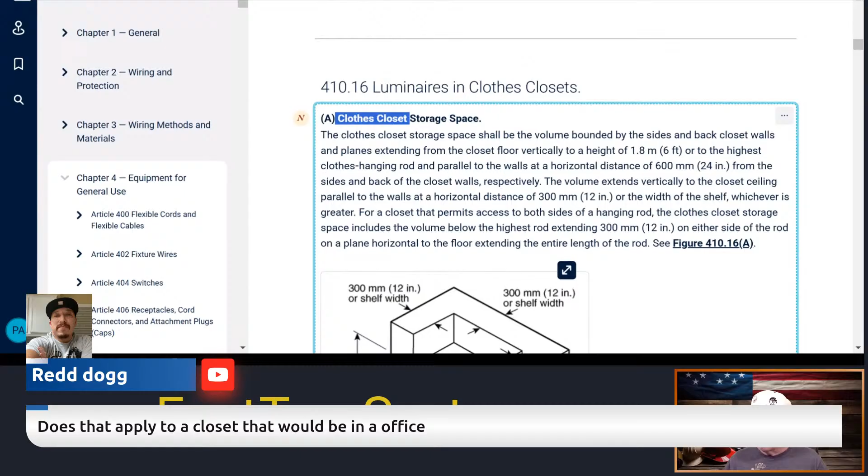So, good question somebody asked here: does this apply to the closet that would be in an office? Only if it's a clothes closet space. If it's a storage closet, then no, it doesn't apply. If it is a clothes closet, then it would be applicable. I don't see anything in this that says it's only germane to a dwelling unit. So I think the big kicker here is whether it is designed for a clothes closet, and we have a definition of clothes closet.

So if we go to Article 100, let's see what it says for clothes closet. Gotta keep going here—I'm just not sure whether it's listed backwards as closet. Yeah, there we go, clothes closet right here. All right, what is a clothes closet? A clothes closet is a non-habitable room or space intended primarily for storage of garments and apparel.

Of course, we have other things right here—definitions determine whether the rules apply. So if the definition does not apply, the area may be classified as something other than a clothes closet, such as a bedroom or something else. So you have rules you have to meet, but a clothes closet is a non-habitable room, and that can be broad—it doesn't have to be a dwelling unit for that to apply if it's a clothes closet. If it's just a storage closet in other than a dwelling application, then it's just a storage closet, and typically its primary function is not for garments.

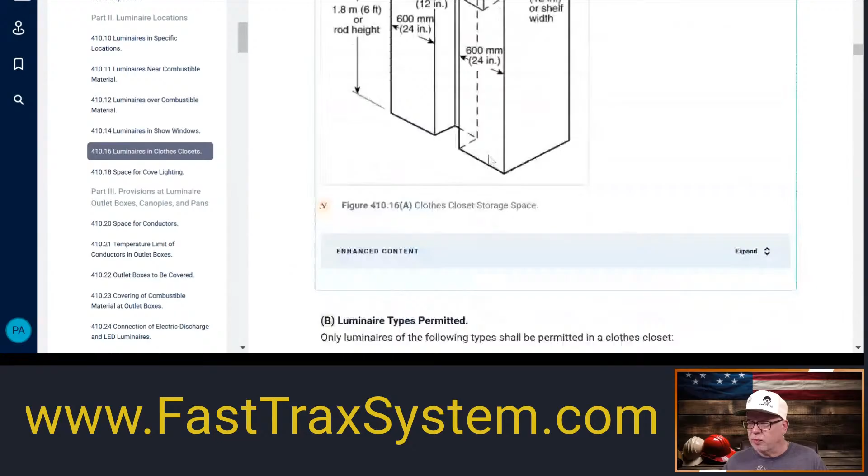Okay, so let's talk a little bit. Let's see here. Yeah, we'll go over the locations really quickly after we look at the space. Let's look at the space real quick. Okay, so this is the clothes closet storage space, and now we have a definition of what that is. That is the area where you would be having the combustible material, okay?

All right, so let's look at it and see: the clothes closet storage space shall be the volume bounded by the sides and back closet walls, and planes extending from the closet floor vertically to the height of 6 feet or to the highest closet hanging rod, and parallel to the walls at a horizontal distance of 24 inches.

Okay, so this space, if you look in this drawing, this is in the NEC as well. So this kind of looks like you have this room, the closet, and you come parallel with the side walls, you come out 24 inches. This is no man's land, which is typically where the garments would hang anyway on the rods around the closet, right? So that is the actual now defined space as the clothes closet storage space.

That is defined now. This space we're talking about is where the garments will hang, okay? And so it comes out 24 inches and it wraps all the way around the closet space, parallel to the walls, all the way around, okay?

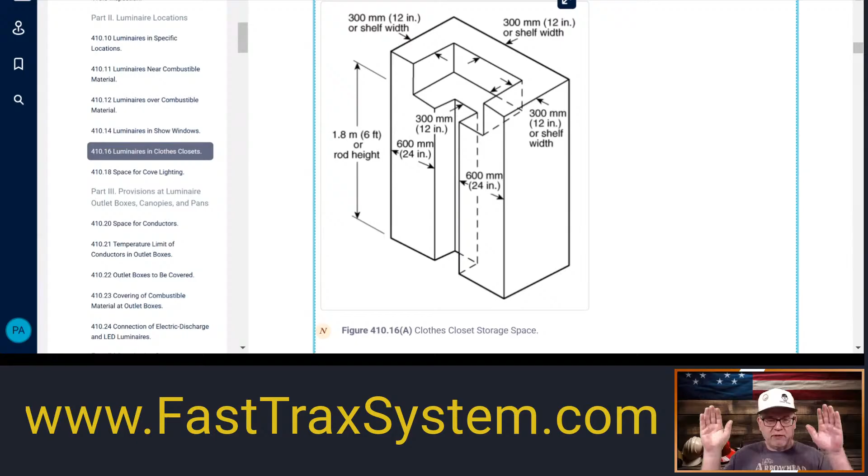And so that's 24 inches out, all the way around, 24, 24, 24. Now the height of this space goes from the closet floor, this 24 inches right here, in the back, 24 inches. This comes out, and this goes up 6 feet, or to the height of the rod, okay, if this is got for storage space.

Now let's read what it says. So it says, again, to the height of 6 feet, okay? So that is your space, or the height of the closet hanging rod. So if you don't have a rod, it's still going to be 6 feet that it has to come up, rod installed or not, if this is a clothes closet.

So you have the clothes closet we've defined, and now you have the storage space for that clothes closet defined inside of the clothes closet. And again, it's parallel to the walls at a horizontal distance of 24 inches, so 24 all the way around, out from the wall. It's making this little area you can't be in, right? And it's specifically for the garments. And the height of that zone goes up 6 feet or the hanging rod, whichever, notice it says 'or' right here.

Then it says the volume extends vertically to the closet ceiling, parallel to the walls, at a horizontal distance of 12 inches or the width of the shelf, whichever is greater.

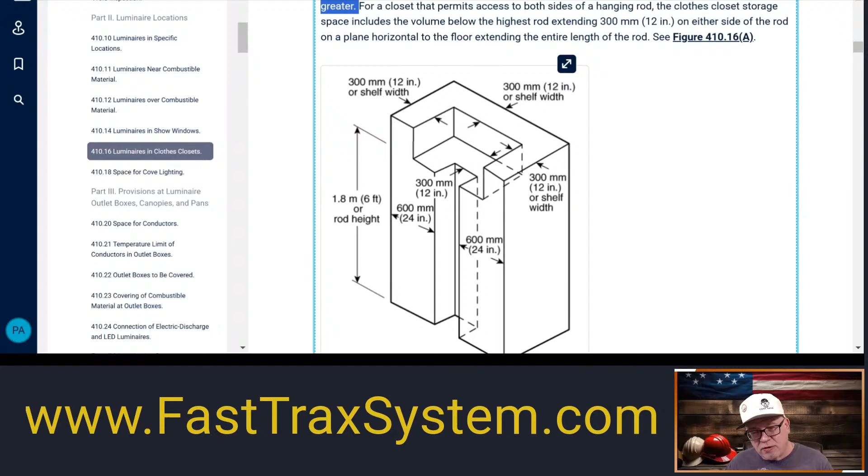Now, could it be greater than 12 inches? Absolutely, it depends on your shelf. And so that's what it says right here. If you don't have a shelf, you still are going to create an imaginary shelf and have that 12 inches.

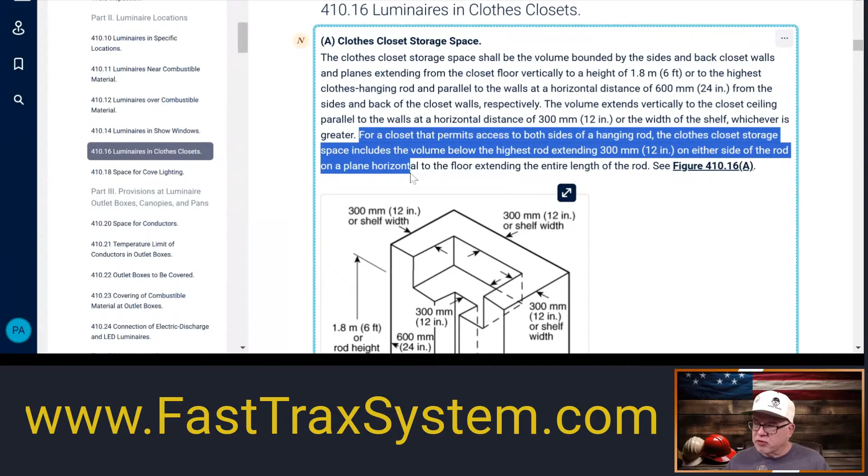Now it says, for a closet that permits access to both sides of the hanging rod, the clothes closet storage space, including the volume below the highest rod, extends 12 inches on either side of the rod, on a plane horizontal to the floor, extending the entire length of the rod. So if you have access to both sides of the rod, depending on how your closet is laid out, you're still going to have this extended space, from the highest rod, 12 inches on either side of the rod. So you're still going to be creating this no-go zone that you can't go into.

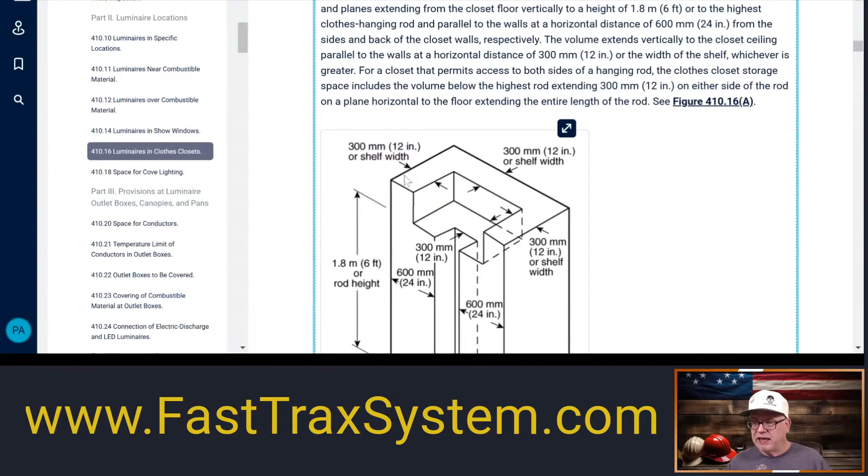And of course we have this figure here, as you all see. So this is a general thing to say, this is just your standard closet. Now they do give commentary on this, and I'll read the commentary. I'll see if I can blow this up a little bit so that we can read it.

All right, it says the 24-inch dimension in the clothes closet storage space is intended to cover the clothes hanging space. Even if no clothes hanging rod is installed, if it is a clothes closet originally designed for garments and clothing, then that kicks in that it's a clothes closet, not just a storage closet. Once you're there, now we're defining what's called the clothes closet storage space. That's why we have the two different definitions: one, we have to define the closet, and two, the space within the closet that these rules apply to.

So it's that 24 inches that comes up 6 feet and wraps around your closet, creating this little zone, if you will. And it says, if such a rod is installed, the space extends from the floor to the top of the highest rod. If no clothes hanger rod is installed, the space extends from the floor to the height of 6 feet. So, to the rod or to the 6 feet: no rod, 6 feet. In addition, the space in which clothes are hung from the closet pole or rod is defined also.

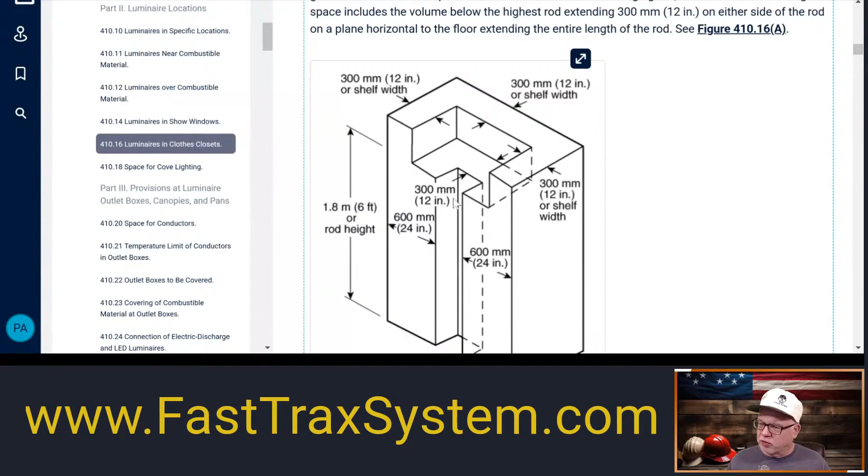All right, so we can install it up here, measuring from the door — anywhere in this space, but we have to be 12 inches from any of this storage space. Not a problem here. If we're installing on the wall above the door, we just have to make sure we're 12 inches away from this side, and 12 inches away from this side. We're obviously going to be 12 inches away from this side because we're mounting it on the wall above. Now, if we put it in the ceiling up here, we just have to make sure we're 12 inches away from this storage space. Slap that bad boy right in the middle, good to go.

All right, next: 6 inches, again for the recessed incandescent or LED luminaires that contain a completely enclosed light source — so this is above the door and on the ceiling for this type of luminaire. Now, for a surface-mounted fluorescent luminaire installed on the wall above the door or on the ceiling, it's 6 inches.

So this one typically comes in a strip. We have to make sure it is 6 inches away from this storage space on the sides, and obviously it's going to be at least 6 inches away from this side here. So anywhere on the wall above the door or on the ceiling, as long as it's 6 inches away from that storage space, that's the one we saw with the lamps that weren't enclosed, just the fluorescent lamps.

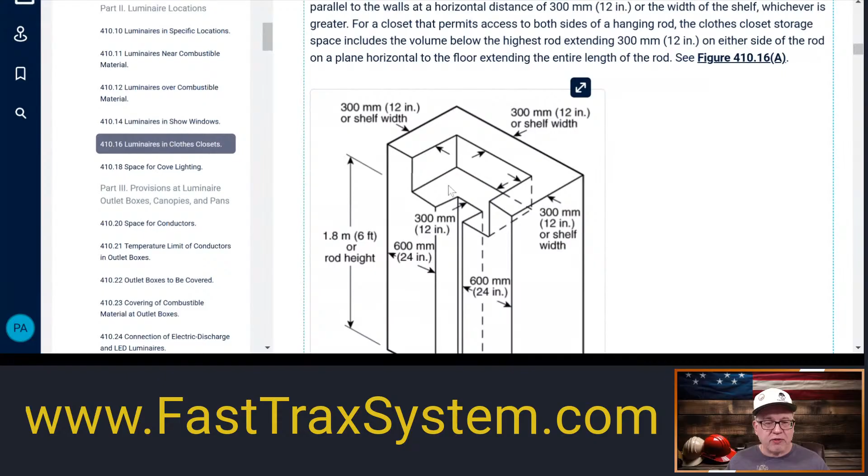So that is 6 inches. I can have a recess in here, and its clearance is going to be 6 inches. I can have the LED luminaires mounted in here, and they only have a 6-inch requirement for clearance. They don't put off as much heat. And if they're a completely enclosed source, we don't have to worry about it busting out, or with LEDs, you don't have to worry about them causing a fire from breaking, like with an incandescent where you've got the exposed filament and all that. You don't have that with these LEDs.

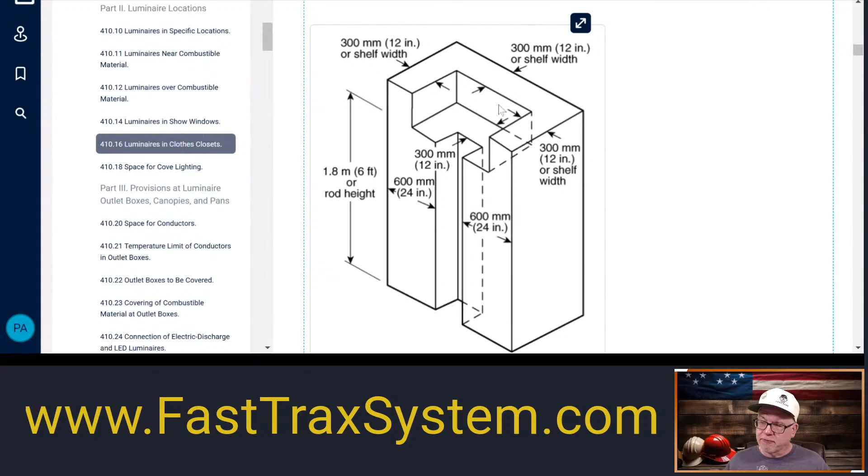And also the last one here is 6 inches for recessed fluorescent luminaires installed on the wall or the ceiling. So if you're going to put recessed fluorescent luminaires, I don't know that I see those anymore, but if you do, they can be anywhere in this space. They just have to be 6 inches from the closet storage space. So you're just going to situate it so that you're at least that distance away, depending on the type that you're using.

Now here's the exception. It says surface-mounted fluorescent or LED luminaires shall be permitted to be installed within the closet storage space where identified for this use. So if you have a surface-mounted fluorescent or an LED, they're permitted to be in that actual closet space, whether it's the 24 inches or the 12 inches above. But the difference is they have to be identified for this use, meaning marked for use inside of a closet space. So a luminaire may be listed, but it may not necessarily have any markings on it that say it can be in the actual clothes closet storage space.

Now, if the manufacturer intended it, like the one I saw with the bar that is designed for the weight and everything, it had printed on it for use in clothes closets. At the time, I don't think it actually said clothes closet storage space because we didn't have that new definition, but in the literature it talked about it being permitted in the areas prohibited by 410.16. That was what was in the literature. It seems now that we've evolved into the exception, which says if it's a surface-mounted fluorescent or an LED luminaire, then it's permitted to be installed in the closet space itself.